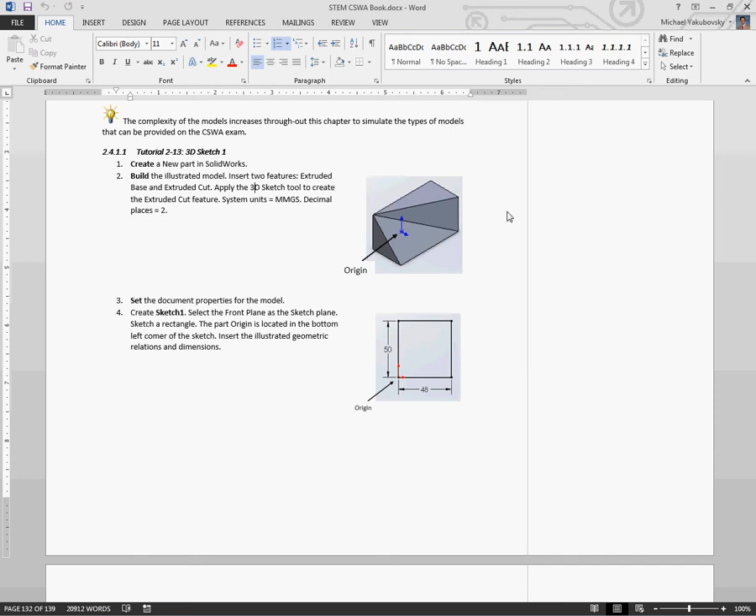We're going to have two features, an extruded base and extruded cut, and we're going to use the 3D sketch tool to do this. We're going to do it in MMGS with two decimal places on it. And so I'm going to walk you through this, and we're going to go through it together on how to do this. So let's start a new part,

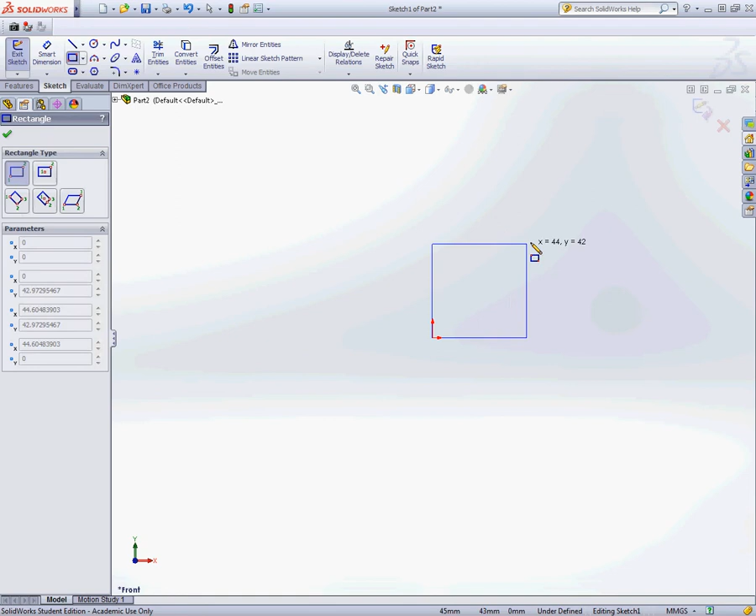and we want to make sure our options with two decimal places. And the first thing we're going to do is sketch a rectangle on the front plane. And we're going to dimension this at 50 high and 48 across, and it's fully defined.

So then we're going to extrude it, and it's going to be an extrusion of 100 millimeters, but we're going to do a midplane and bring it into the middle. Alright, let's bring that down a little bit. Now we're going to create our 3D sketch. So we're going to go over,

on a 3D sketch you don't select a face or a plane. You just go over to your sketch tool, click this little drop down and select 3D sketch, and then we're going to start sketching. Now I'm going to use the line tool, and you're going to see a little XY with it. If you don't have that XY, hit tab until you do. As you hit tab, you'll see those change. You want the XY to be up. We're going to just use the XY for this whole exercise.

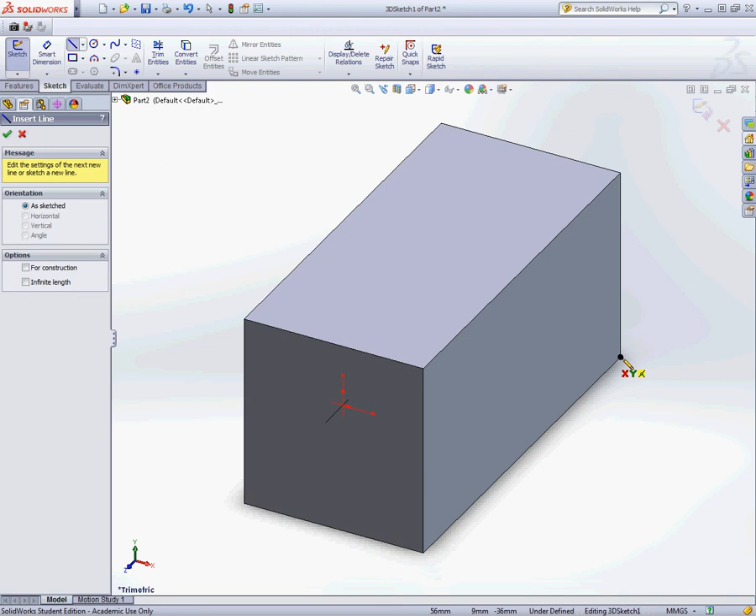Get in here, and when you see the big black dot for that vertex, you're going to go over to this corner all the way across to the further one, side to the other. Then we're going to go from here down to this corner across the front face, and then we're going to go back to where we started, and that's going to define the sketch. It's fully defined now because we're just using the vertices, and we will accept all those, and then we're going to do an extruded cut.

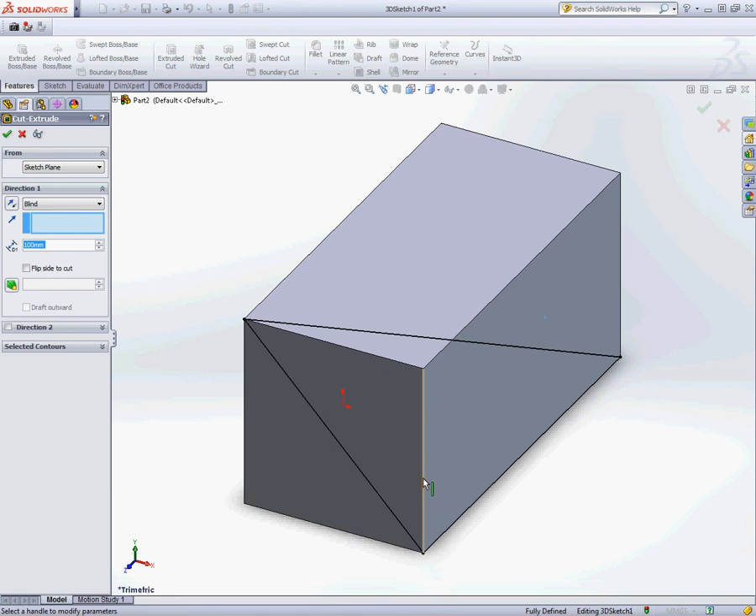Now when you're working with the 3D sketch, you're going to have to pick a reference point to cut from, and this is your direction of extrusion. And what we want to do is select this vertical line right here on the boss on this extrude. So at the front right vertical edge, that's the one you want to select. And when you select that, sometimes it takes a second to think.

It's going to tell it which direction to extrude, and it's going to move along that direction of the line that we chose. And so you can see that it's extruding in that direction. If I were to actually spin this around, you can see the whole extrusion there. And then we accept that, and that will kick out everything that we wanted and cut our part nice and cleanly. So that is how to work with 3D sketches.

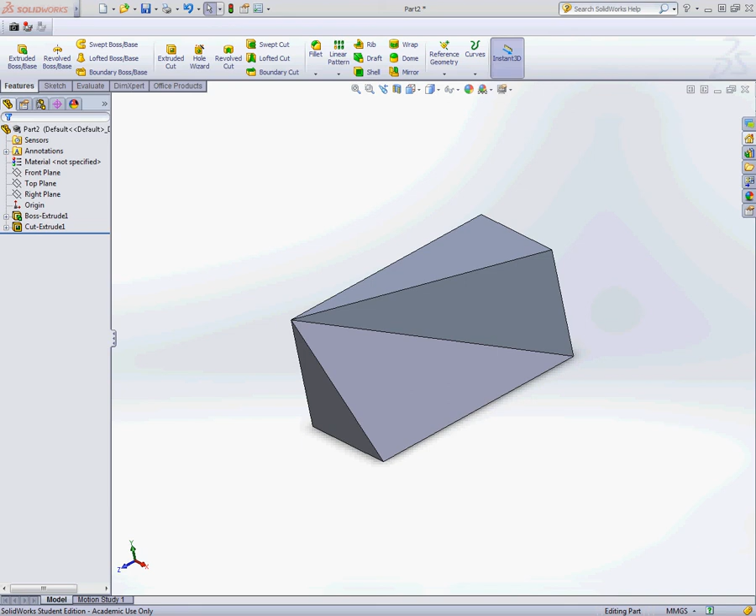You're going to save this and name it 3D Sketch 2-1, and that's it for this tutorial.